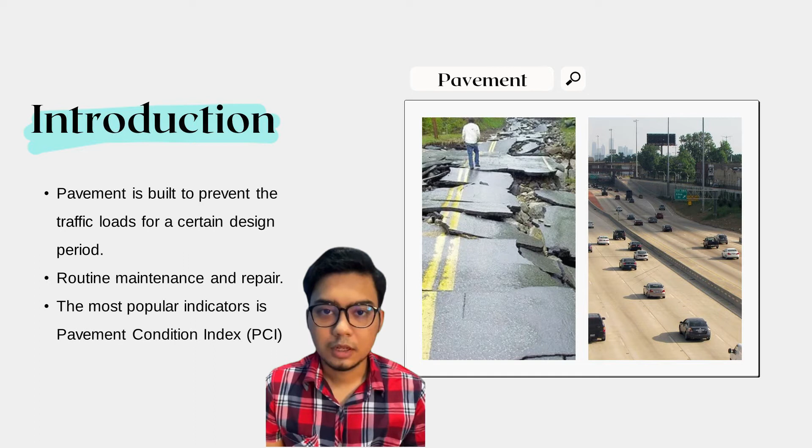For introduction, pavement is an important part of transportation infrastructure. It is built to withstand the traffic loads expected for a certain design period. Due to the importance of safe and reliable transportation and the need for routine maintenance and repair, pavement condition assessment has become an integral part of the pavement management system, or PMS.

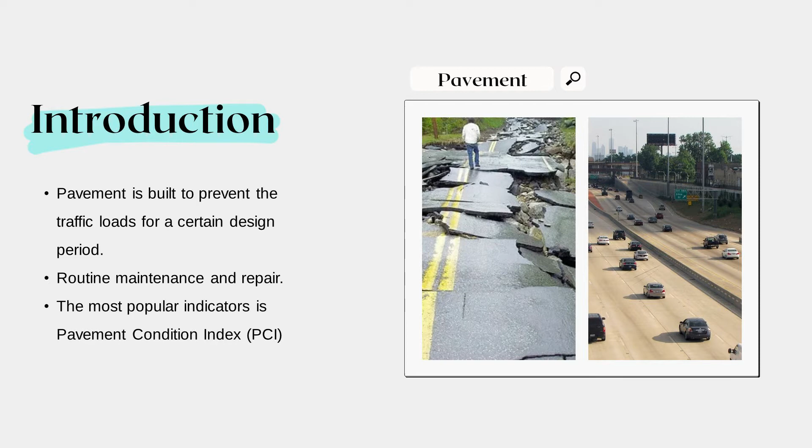There are several indicators used to describe pavement condition, such as the pavement condition index, current service index, international roughness index, and the current service index. PCI is one of the most popular indicators for pavement evaluation.

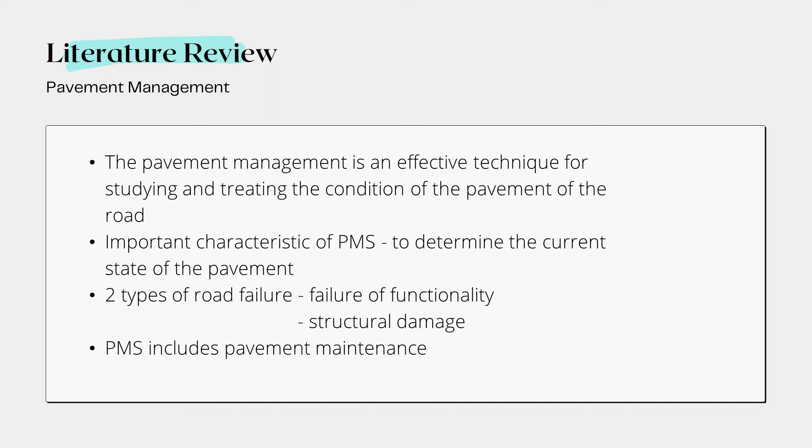PMS includes pavement maintenance. Next is about the pavement condition index, PCI. PCI is a technique for measuring road pavement by type and extent of damage, and is used as a reference in the maintenance industry. There are several advantages of PCI: identification of need for immediate road maintenance and rehabilitation, establishment of road network preventive maintenance policies and budgets.

PCI is a numerical index that ranges from 0 to 100, where 0 denotes failed pavement and 100 denotes perfect quality. PCI is based on subjective inspection and observation.

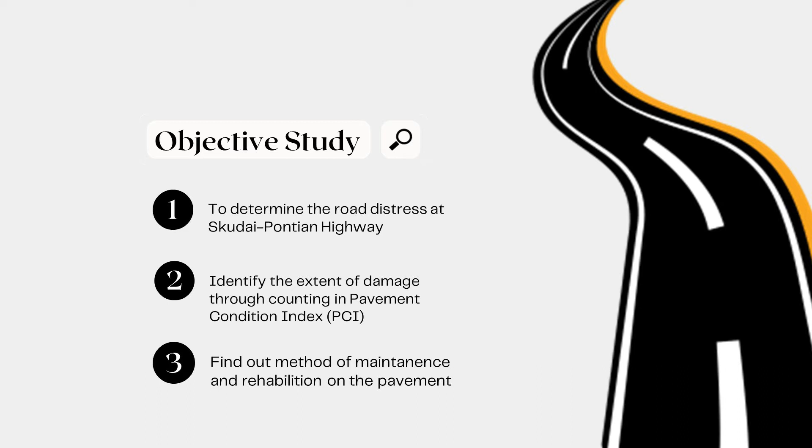Objective of the study. There were three primary objectives in this study: first, to determine the road distress at Skudai-Pontian highway; second, to identify the extent of damage through counting in pavement condition index PCI; and lastly, to find out methods of maintenance and rehabilitation on the pavement.

For methodology, there are a few types of road distress that were found: shoulder drop off, pothole, alligator cracking, patching, and slippage cracking. For calculating PCI, we must find the deduct value, density, deduct value, corrected deduct value, and PCI value. Density is based on the type of road distress and the distress amount in square meters divided by sample unit area in square meters, times 100.

For deduct value, we use a deduct value curve based on distress type and severity. The total deduct value is the sum of deduct values. For corrected deduct value, we also use the deduct value curve. For the PCI value, for every sample we take 100 minus the corrected deduct value. For the overall PCI, we sum the PCI of every sample and divide by the number of samples.

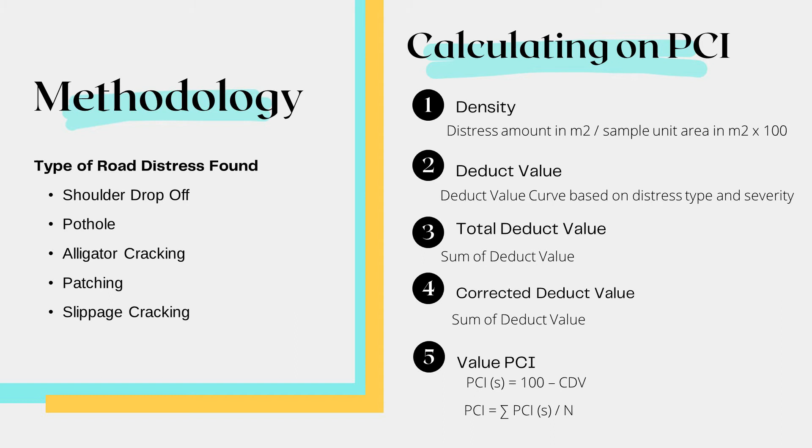Next is about the data analysis. As we all know, within this project we are using the PCI method, or pavement condition index method, in order to identify the condition of the study road. The PCI method consists of three steps: first, identify the maximum allowable number of value M; second, find the maximum corrected deduct value CDV; and third, determine the pavement condition index and its rating.

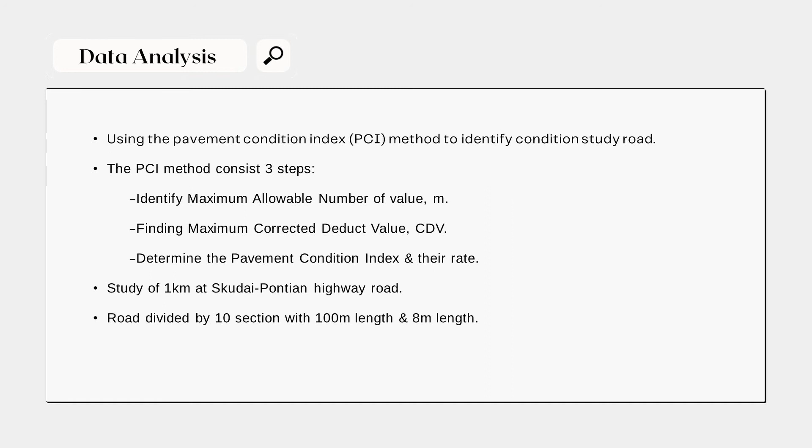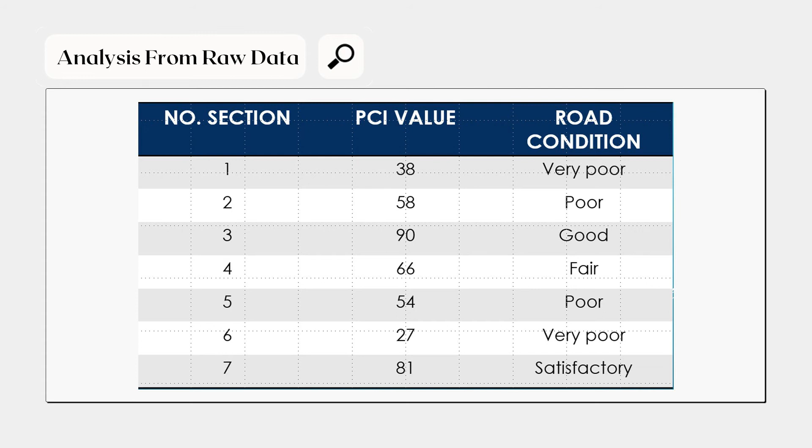Next is the analysis from raw data. As we can see in the table on the slide, sections 1 to 10 show the PCI value and their rating condition. For the summary of the data analysis, the overall PCI value was 65.8, and the rating was good condition.

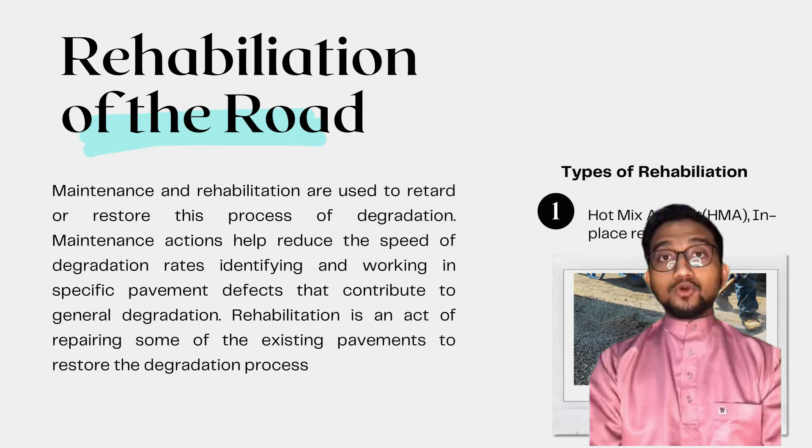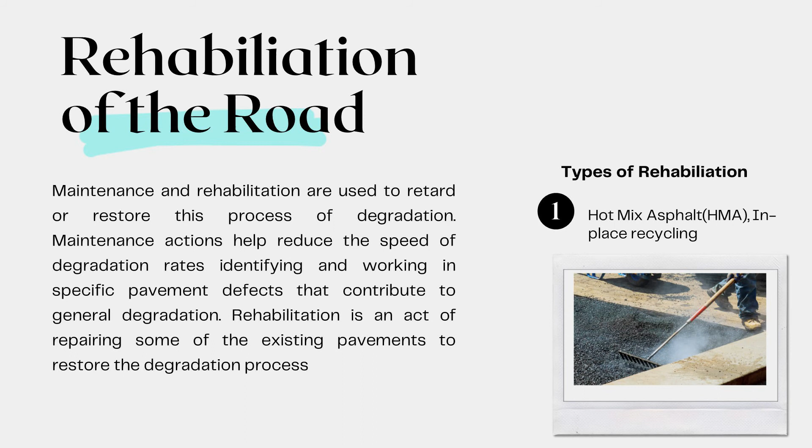Let's move on to rehabilitation of the road. Maintenance and rehabilitation are used to retard or restore this process of degradation. Maintenance actions help reduce the speed of degradation rates by identifying and working on specific pavement defects that contribute to general degradation. Rehabilitation is an act of repairing some of the existing pavement to restore the degradation process. There are two types of rehabilitation: hot mix asphalt and in-place recycling.

For structural overlay, structural coatings are used to increase the capacity of the pavement. This can be classified into the following categories: number 1, engineering judgment; number 2, component analysis; number 3, non-destructive check with deflection limit criteria; number 4, mechanistic empirical analysis.

Road maintenance work is classified into 3 categories: routine, periodic, and emergency. Routine maintenance is based on periodic, meaning daily inspection of the condition of the pavement, cutting and filling of slope, drainage system, bridge and other structures to monitor for any defect and damage.

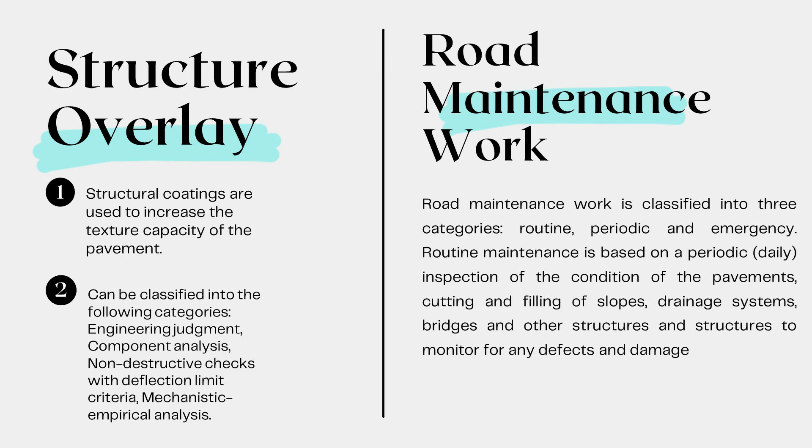Finally, for the conclusion in this study, the 1 km work section of Skudai-Pontian Highway was rated as good, with an average PCI value of 65.8, and most of the samples were rated as satisfactory. The pavement degrades over time as a result of traffic and environmental effects.

Timely intervention is required to keep existing pavement in good working order, which helps to prevent pavement deterioration and maintenance costs. Using the PCI value obtained, maintenance can be carried out in the most effective way for enhancing road condition and ensuring the safety of road users against a variety of threats that could risk their lives.